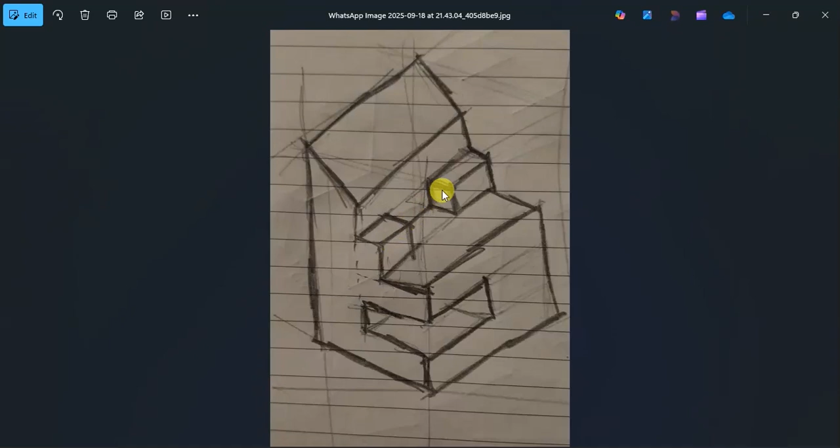So we're going to draw this particular shape in the end elevation first, this way. Then we're going to press pull it the distance of 60. After that, we're going to insert this first block, the next block, and this other block on the other end. Then we're going to join everything using the union command.

So we'll make sure that our AutoCAD is up and running, and that we are drawing using the 3D modeling workspace. Then first things first, we'll come to home.

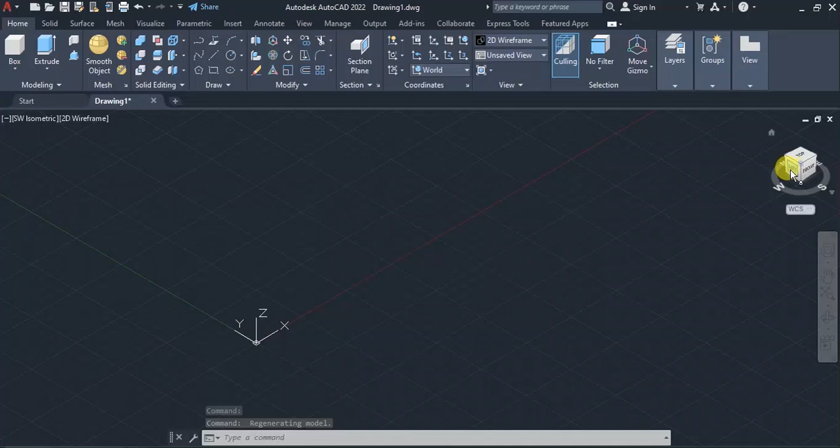After coming to home, make sure that we start drawing from this other side, which is the left side, and immediately you change the view cube. We'll make sure that we also change our coordinates to view, so that we have y and x.

Back to our drawing, we can deduce that we are supposed to draw. I'll start from here, so we'll come 55, then upwards a value of 100. So let us begin with that first.

So we take polyline, zoom out. So we have 55, but the distance is too small, one point. So I'll zoom out again and again, then I'll begin my drawing.

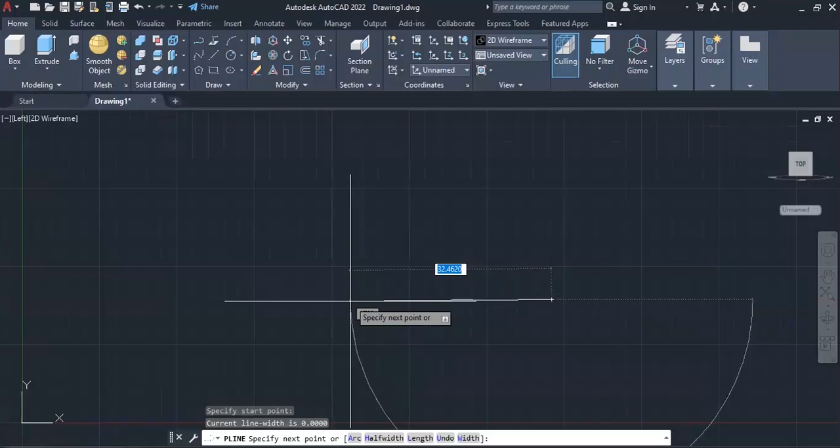So the first part, then I'll enter the dimension of 55. I'll make sure that my object snap is on, same to my ortho mode, which is found just below your status bar at the bottom. So I'll come down and turn them on.

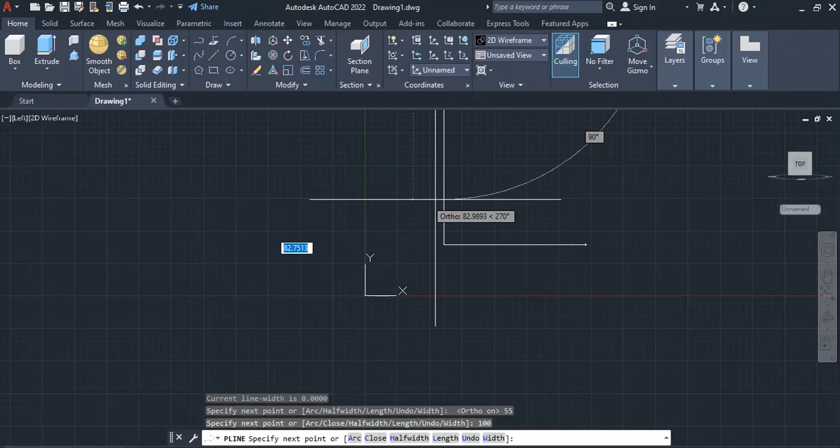So drawing in ortho mode, I start with 55, enter, then upwards a value of 100, enter. As you can see from here, this distance is 25, and this height is 20, as you can see from here.

So we need to go this side a distance of... so we'll start off at this point. I'll break it, so this is what I'm going to do. At that point I'm going to press enter.

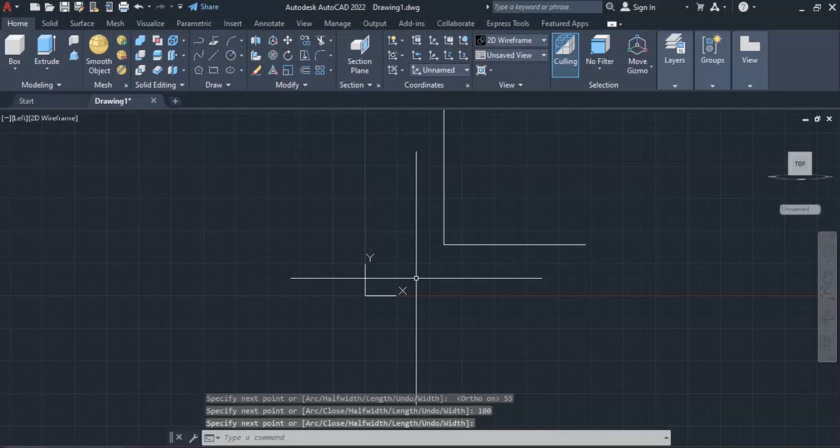Then zoom out, take this one some distance away, so I'm going to offset a line this side a distance of 25. So I'm going to offset this one a distance of 25 first. Then I'm going to offset another line on top downwards a distance of 20.

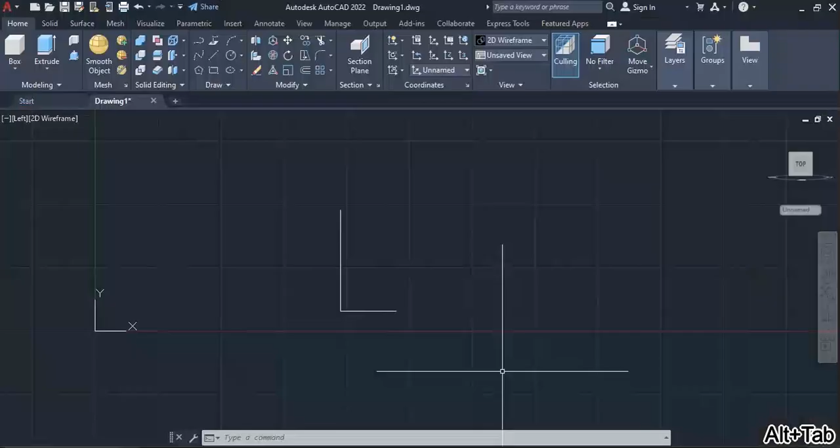So I come, have a line, enter, then I'll offset it a distance of 25 and select it, the line, then have another line on the top, as such, then offset it a distance of 20 downwards.

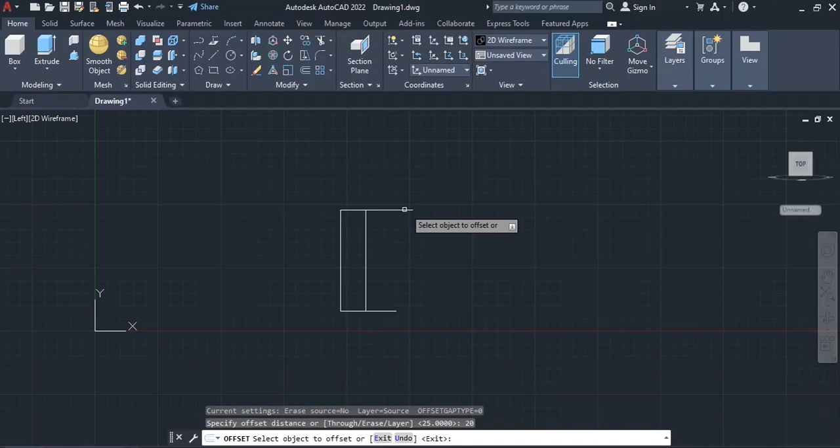Then for this polyline, I'll select it, then I'll continue with it. So from here to that point, then I'll continue as per my question. So after getting to this point, I'll go down 15, then this side 15, then down 15 again. So that is our operation.

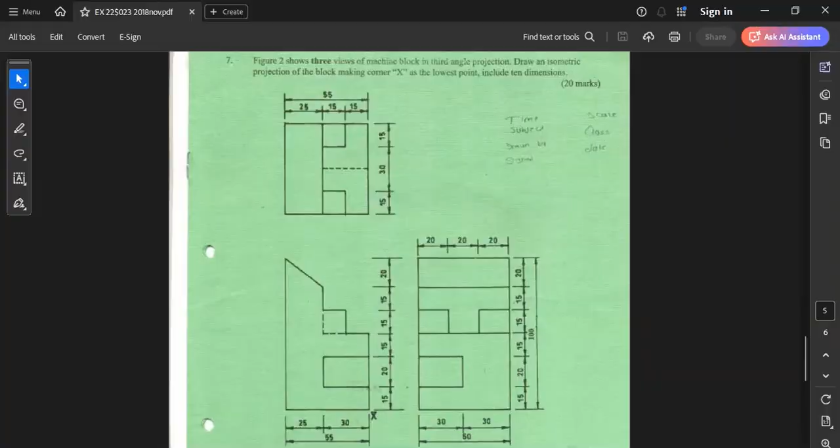So after this point, this side 15, enter, down 15, enter, sideways 15, enter. Or yet, we could just as we had planned earlier, we could first delete this.

So we'll delete that, then just have a line from this point to this point, and because the 15s we can add them later, we'll leave it at that. Then the next one, from this point you have to go down 30, then 30.

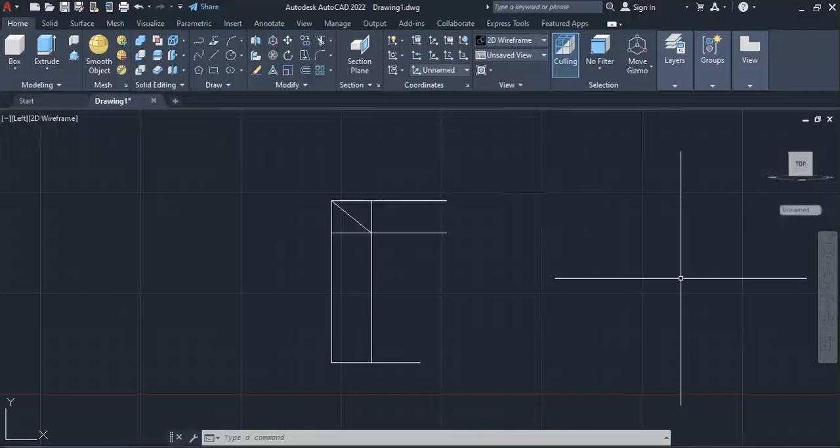We can delete this and this, or rather, you can just delete it. So we'll pick our polyline. From here we'll go down 30, enter, then to the side 30, then enter.

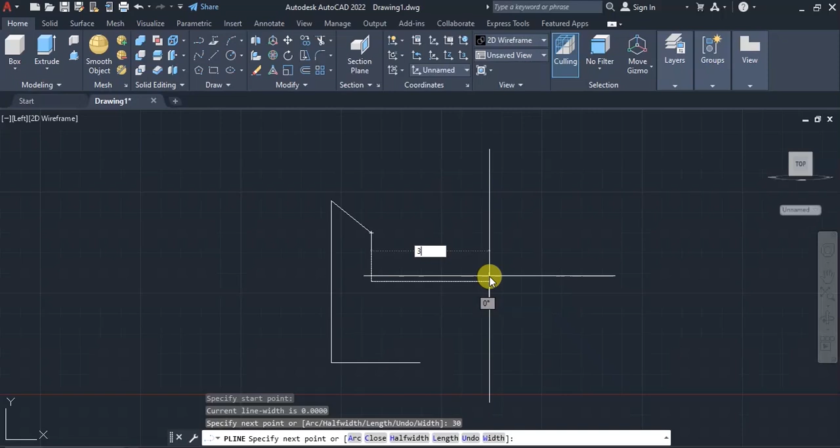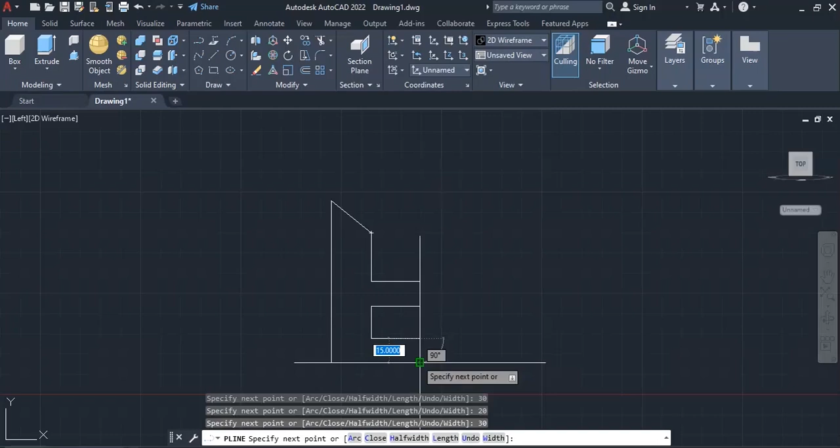Then the next bit, so we have 30 and 30, then will come 15 and 30. We'll come down 15, enter, then 30, enter, then downwards 20, then again 30, enter, then lastly we'll join it to the end, so that we have that particular shape as it is in the question.

So we're going to give that press pull of 60. After having this, we're going to select everything, then using join, we're going to join them all together as such.

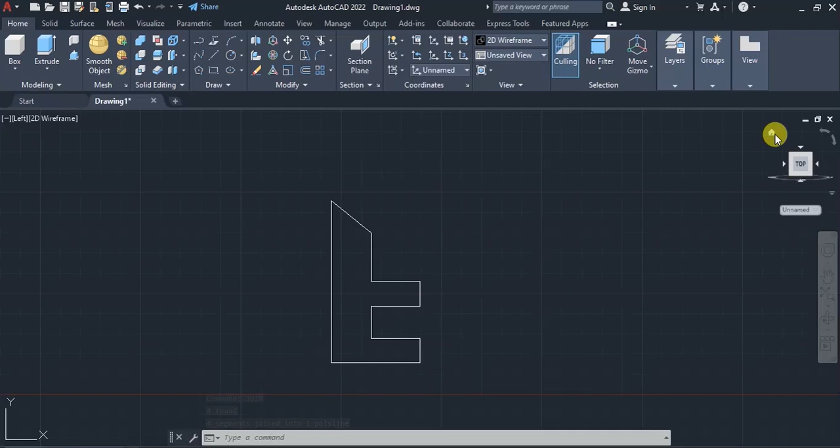Then thereafter we're going to come to home, press pull this a distance of 60, then enter. After having that, we're going to come back to the end view.

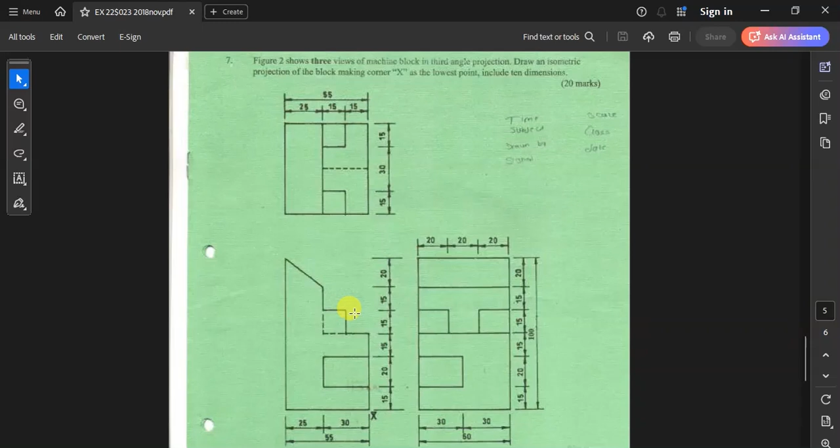I'll come to UCS World, then click on the left part first. Then we're going to draw these two blocks. The first block is this one, having a dimension of 15 and 15, and the next one is this one here, having a length of 30 and 20.

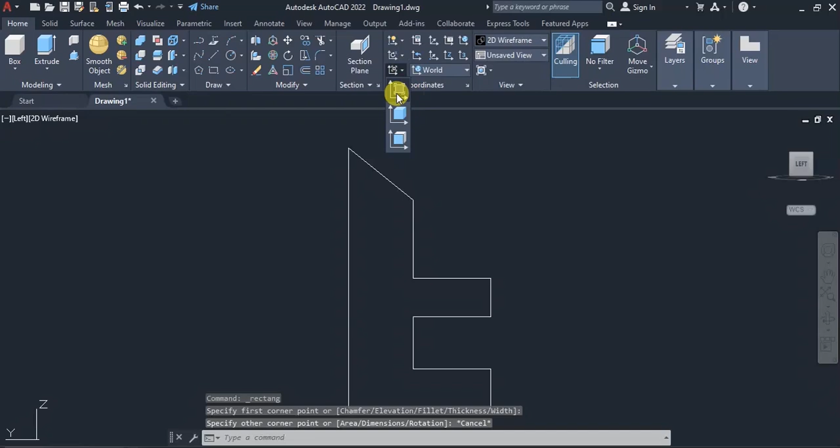So we'll draw those two. The first one will come, pick the rectangle, and we forgot to change our coordinates to view. So we'll come to the rectangle, click, then the first distance is 30, then press tab, the next distance is 20, then press enter.

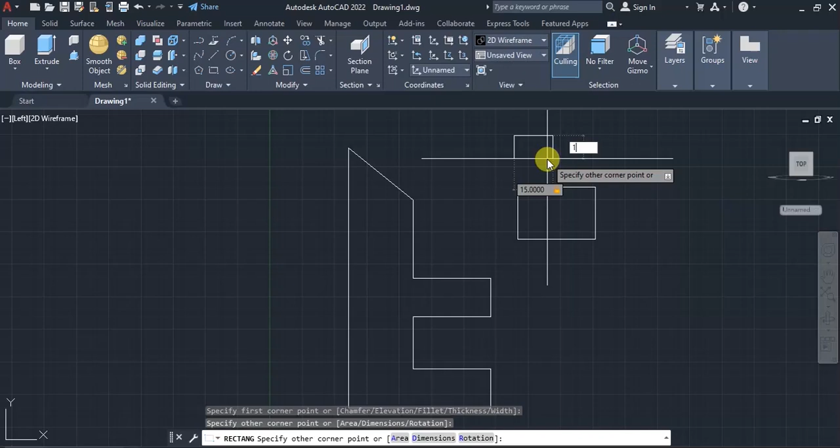Then the next one we have 15, tab, and 15, then enter. So after this we're going to go back to home.

I'm going to move this away from my diagram, or simply put, I can select this, then right click and hide it for a moment. So afterwards I'm going to press pull this with 15.

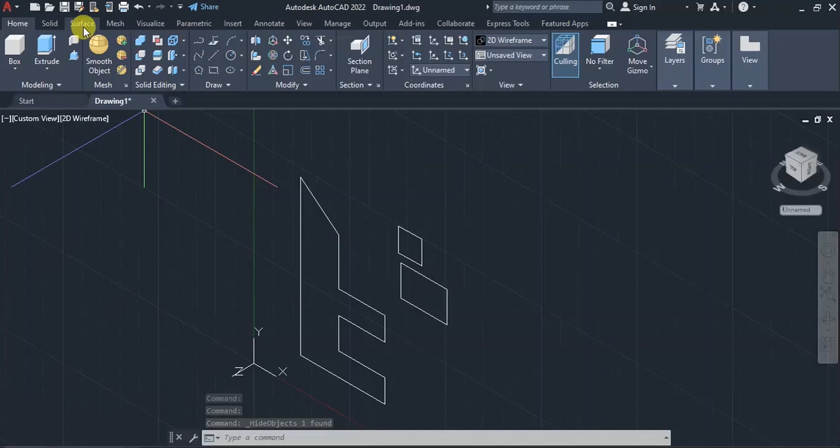I'm going to press pull, click on this, then 15, enter. Then the next one, I'm going to press pull it a distance equivalent to 30. So I come here, press pull distance equivalent to 30, then enter.

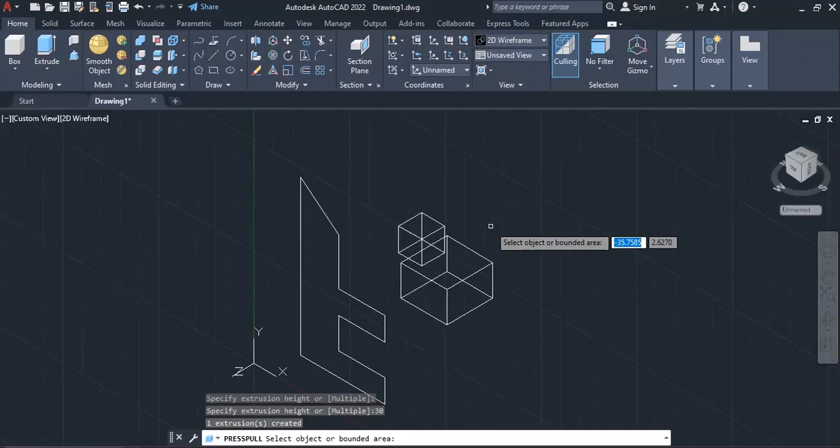So I can delete this polyline, then right click, come to isolate, then end object isolation. For this first one, I'm going to move it by clicking on the move, clicking on the object, then enter. Then I'm going to move it from this endpoint to the endpoint of my solid block.

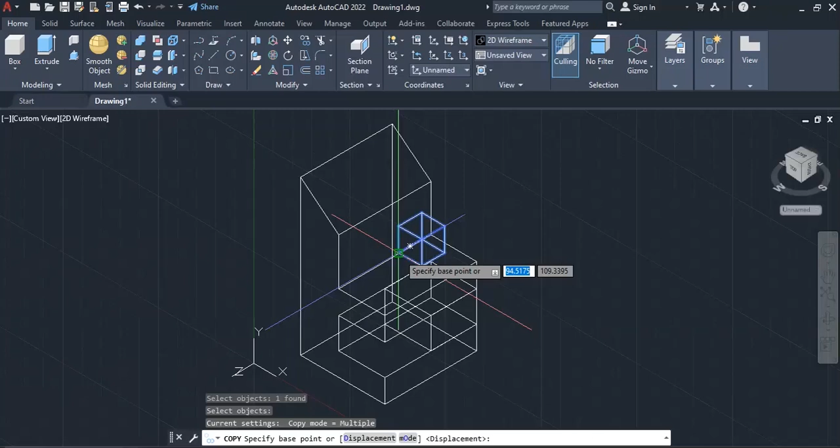Then I'll select this 2D polyline and delete it. For this, I'm going to copy it first. So I'm going to come to copy, select the object, and I'm going to copy it from this end to this particular end. So afterwards, I'm going to move it from the farthest vertex to this other vertex.

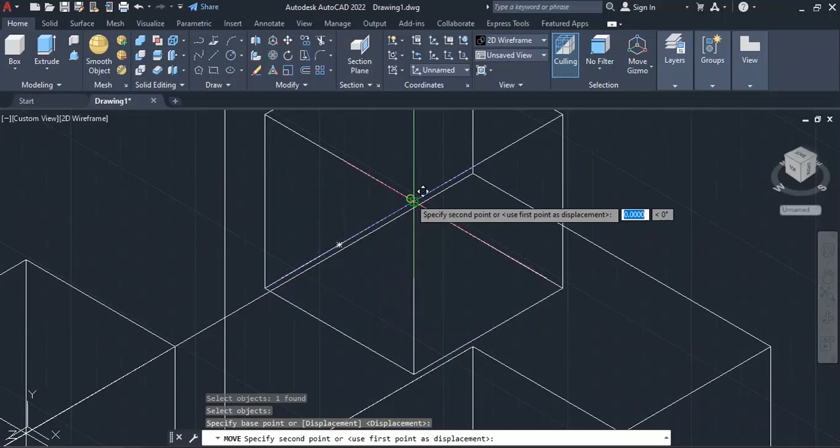So I'll come to move, select it, press enter, come to the farthest vertex as my endpoint, click it, then click it on this other endpoint as such. Afterwards, I'm going to select this and delete.

So after that, I'm going to change my visual style to, let's say, conceptual. Then you can see we made a mistake. So again, I will come to move, select this, then move it from here to there first.

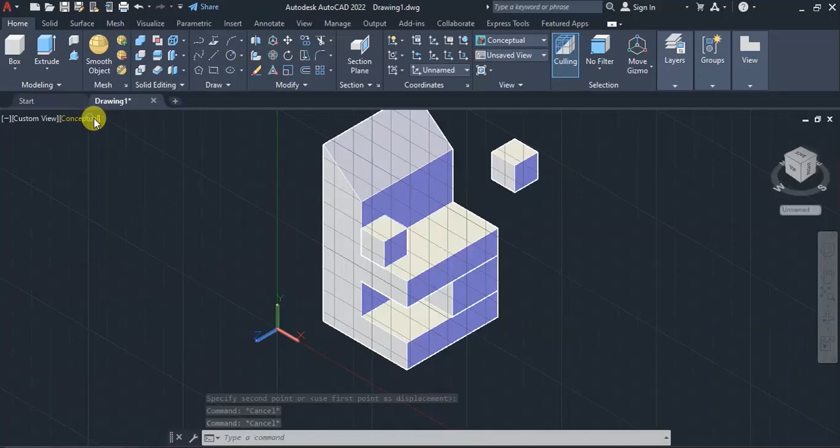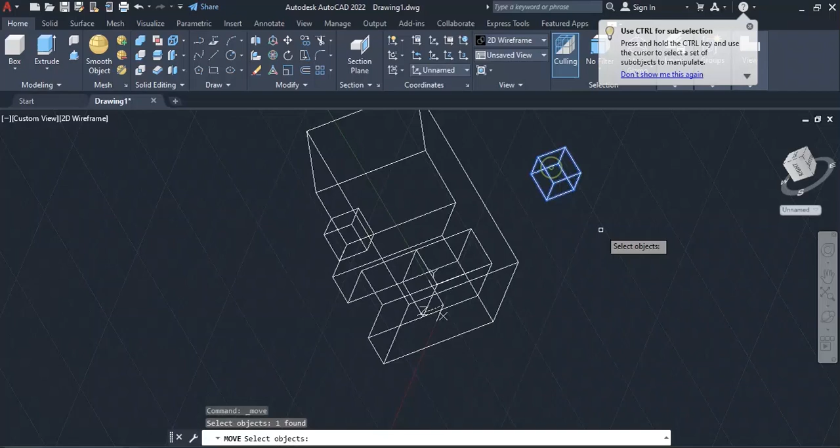And afterwards, I'm going to move it. I'll change the visual style to wireframe first. For me to move it appropriately, I'm going to free orbit it so that I can come to this other corner. Thereafter, I'm going to move it, select it, enter, then select it from this vertex to that particular point. And as you can see, that is what we now have.

So I can change the visual style to conceptual, then I can come to home so that you can see it well. Then afterwards we're going to come to solid, then union, select this object, the next one, this one, and lastly this one.

And this one is already selected. Let me just start again. I'll come to union. This is the first object, this is the second object, the third object, and the fourth object.

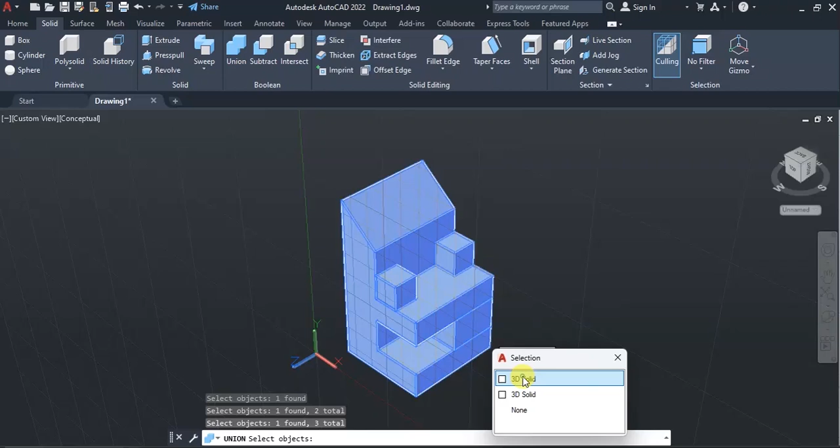Then I press enter. So afterwards, I'll come to Conceptual, come to the custom view, then select parallel. Then I'll zoom in so that you can see it better.

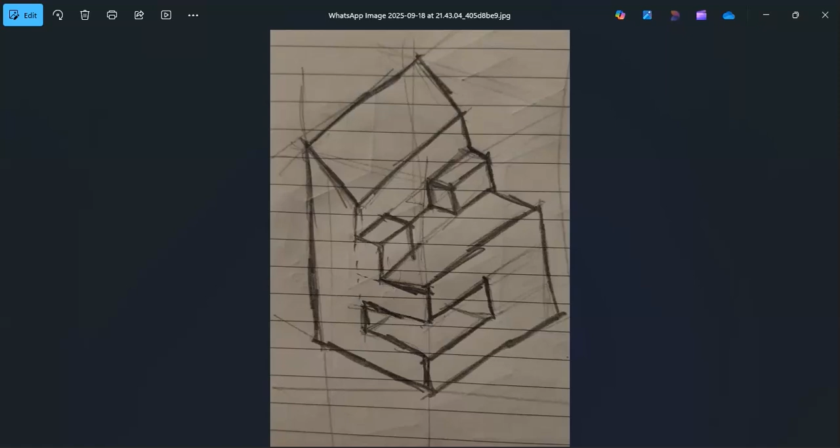Pan my drawing, and that is exactly the diagram that we wanted to come up with. As you can see in the sketch, that is the way it was sketched, and this is the way that it looks in our drawn 3D isometric shape. So again, I want to thank you for tuning in for this class.